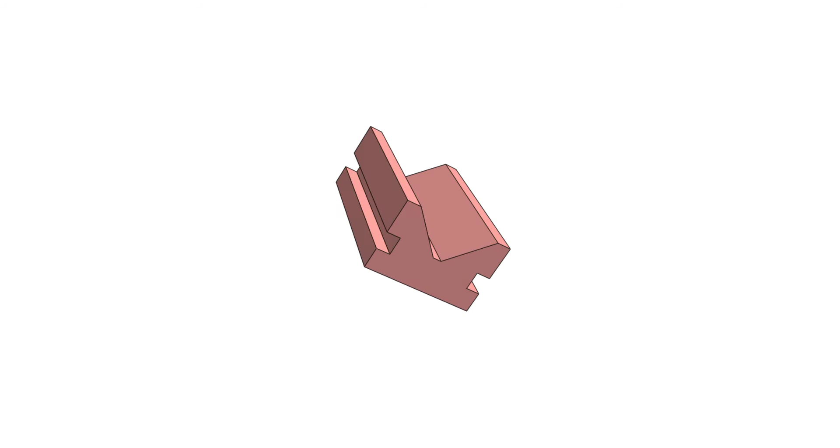Today we gonna solve exercise number 70. This SolidWorks 2020 video tutorial is for my beginner friends. From this SolidWorks exercise video tutorial, you will learn how to design a very basic part. Hope you will stay connected with us and continue learning SolidWorks modeling.

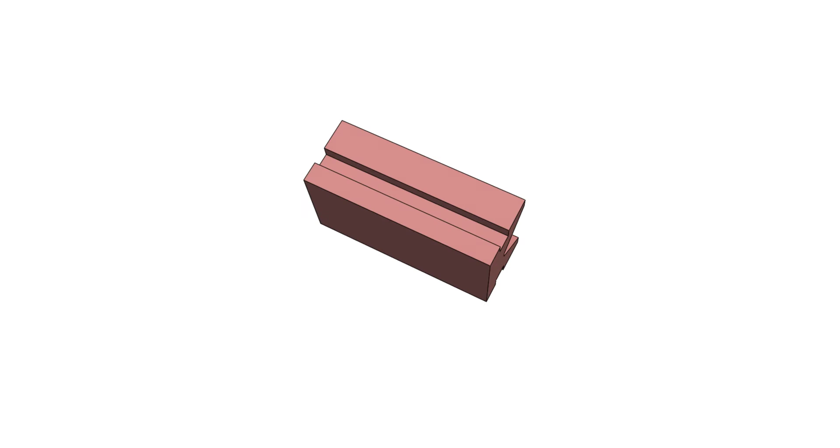Today I will teach you the use of various SolidWorks tools like line command, smart dimension, mirror entities command, and extrude command. We will use only one sketch and extrude command for completing this SolidWorks 2020 tutorial. We gonna sketch the front view of the part and then extrude that for completing today's part. Hope you will enjoy and stay with us throughout the tutorial and become a SolidWorks 2020 Pro designer.

Let's start. Click on the new part. Go to Apply Scene and select Plain White. Go to Material, right-click, and select Edit Material. Then choose your desired material.

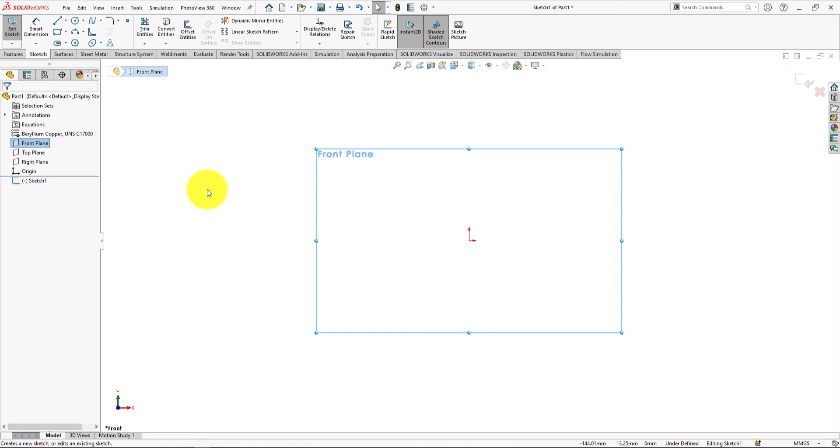Now we will sketch the front view of the part. Left-click on Front Plane and choose Sketch. Take Center Line command and draw lines like this. Height is 15 plus 13 plus 25 is equal to 53 millimeters.

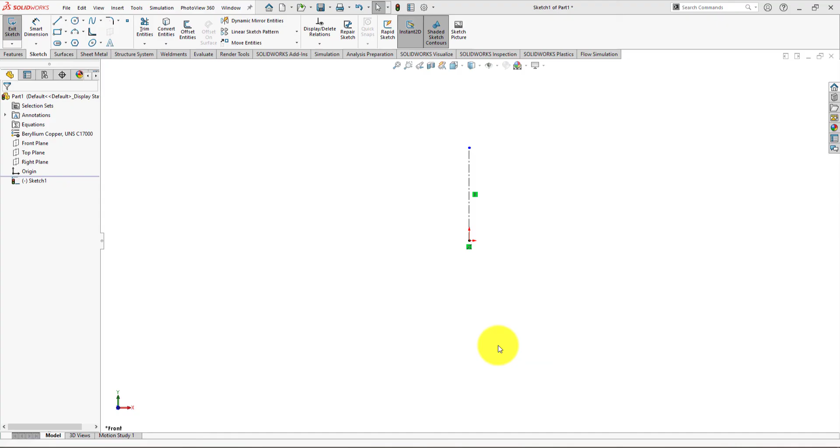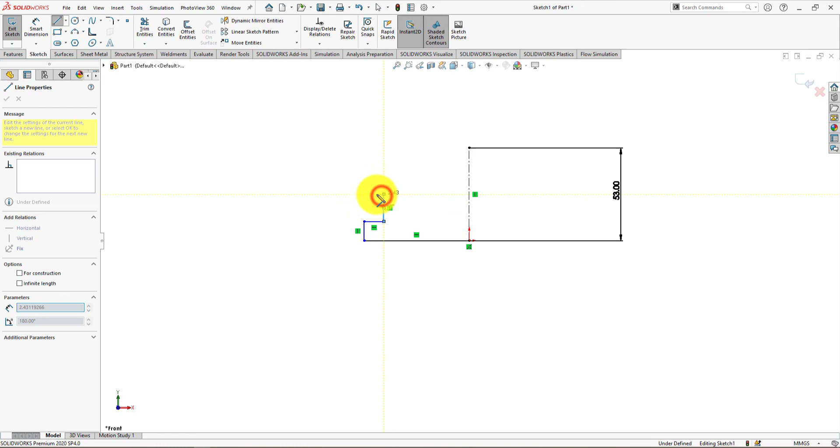Now take the line command. Now select Smart Dimension.

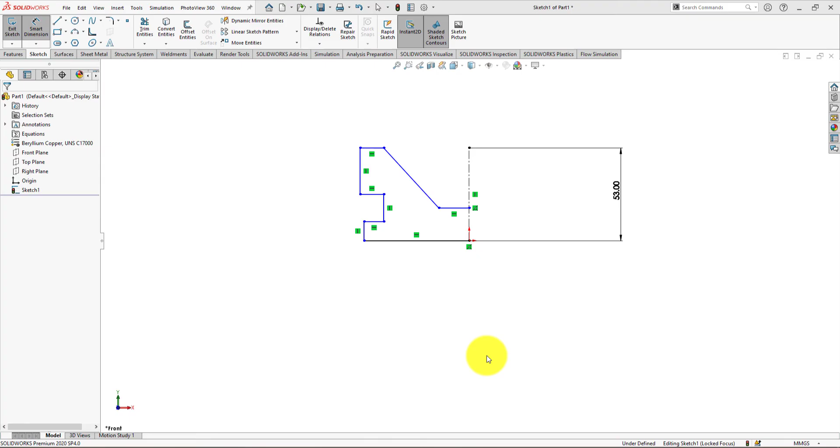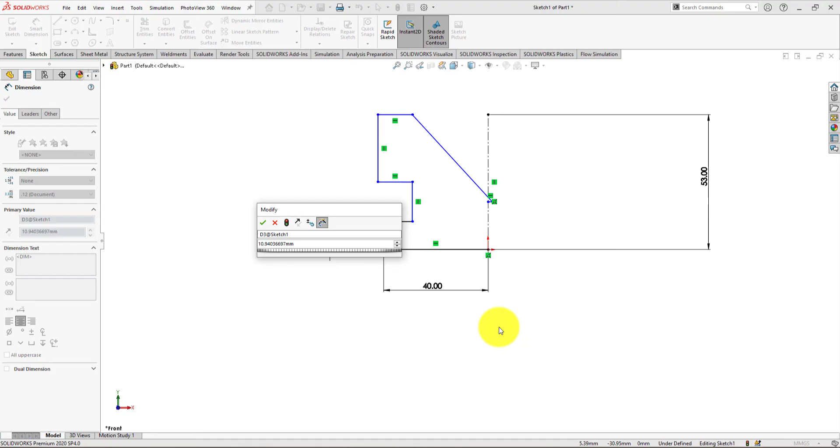Width is 40 millimeters. Height is 15 millimeters. Width is 10 millimeters. Height is 13 millimeters. Height is 28 millimeters.

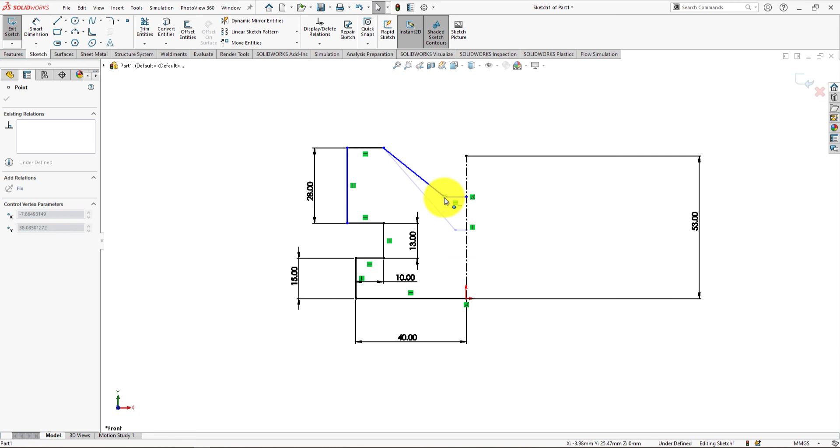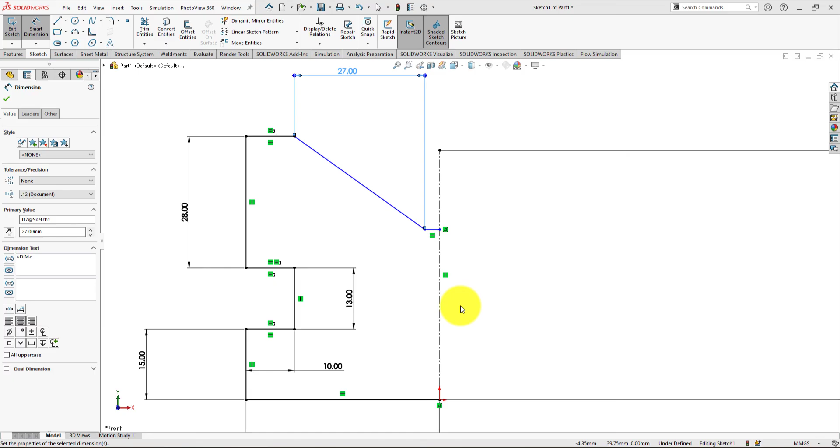Make equal. Width is 27 millimeters. Now select Smart Dimension. Height is 28 millimeters. Height is 25 millimeters.

The sketch is fully defined.

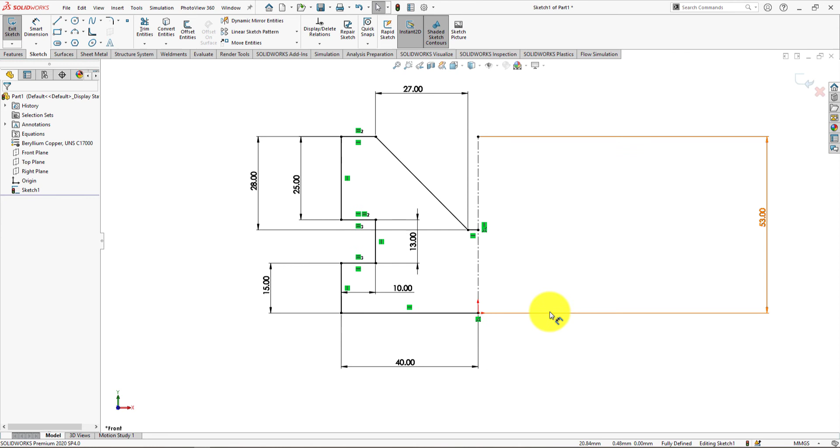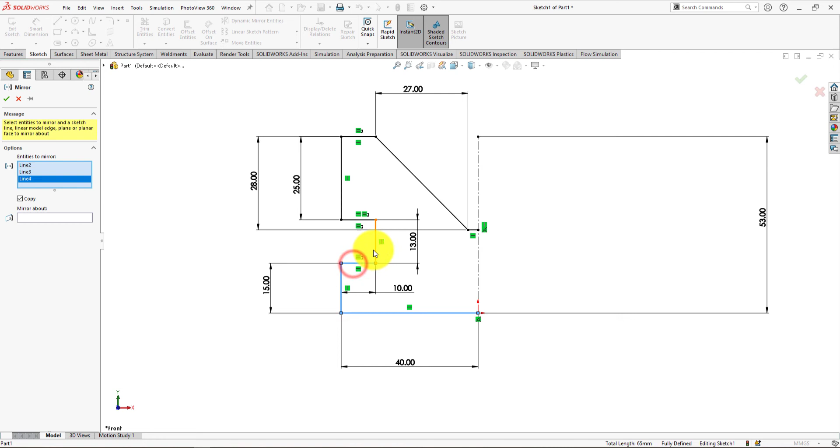Take Mirror Entities command. Select these items as mirror entity. Mirror about this axis. Press OK.

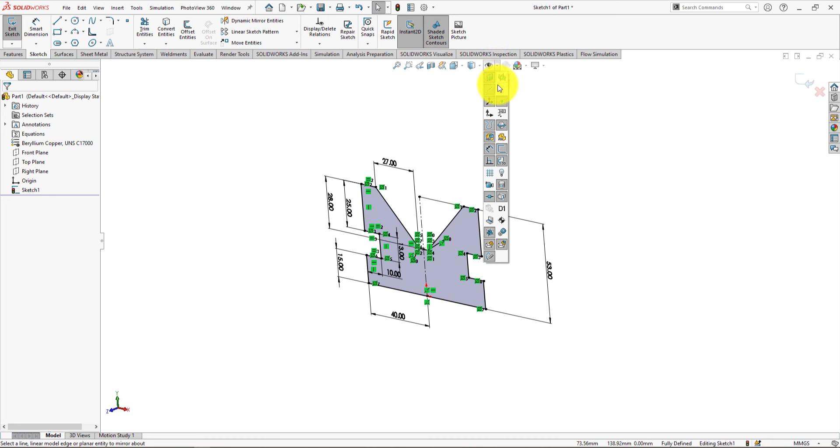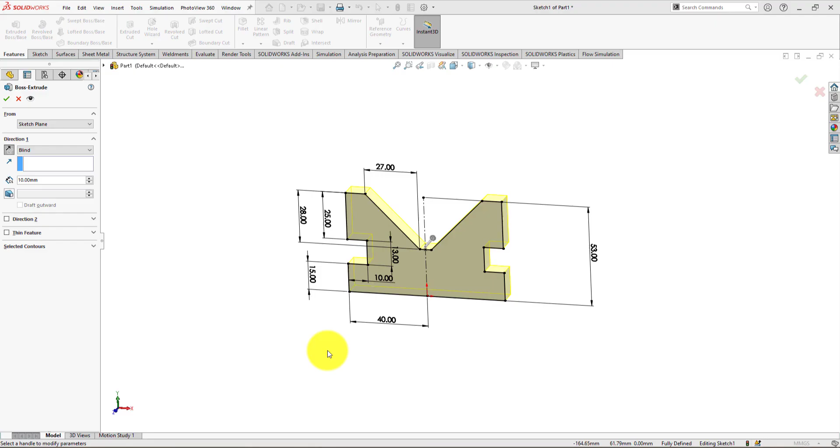The sketch is fully defined. Now go to the Features menu and choose Extrude command. Reverse direction. Extrude length is 140 millimeters. Press OK.

Press space button of your keyboard and select isometric view. Congratulations! This is the part which we were trying to build.

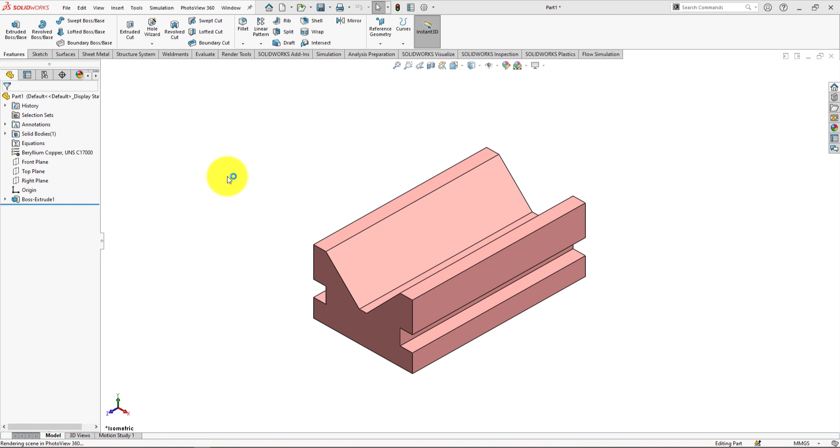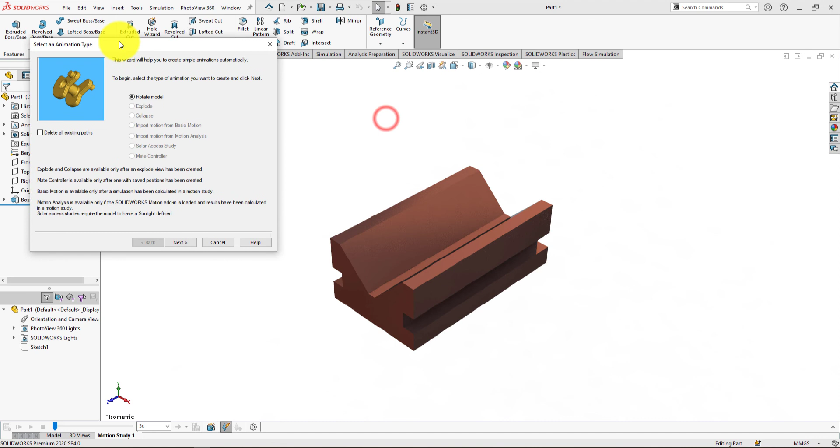Make this speed 3x. Change this duration to 30 seconds and click Finish.